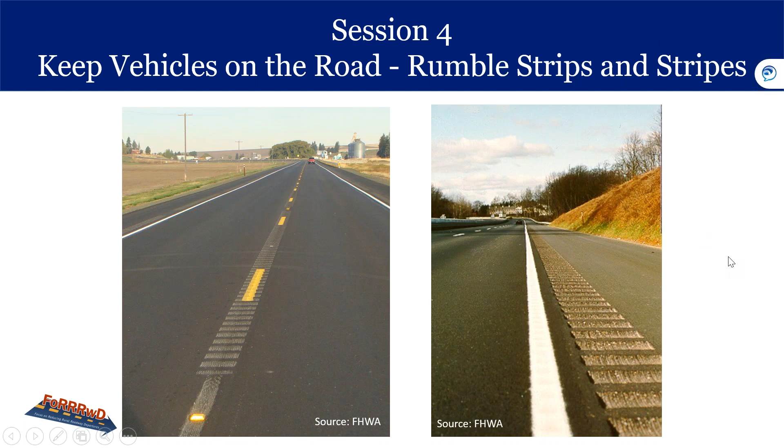Okay, so rumble strips and rumble stripes, let's get cracking on this. Our learning outcomes on this subject will be that after all of this, you'll be able to describe a rumble strip and a rumble stripe, and you'll be able to describe the placement criteria and installation considerations for rumble strips and stripes. You'll also be able to recognize the crash reduction potential for rumble strips and stripes.

So let's do a knowledge pre-test, and we're going to watch a video, and we'll ask you what is the concern raised in the video, and then what countermeasure could be used to address this concern. So let's watch this video.

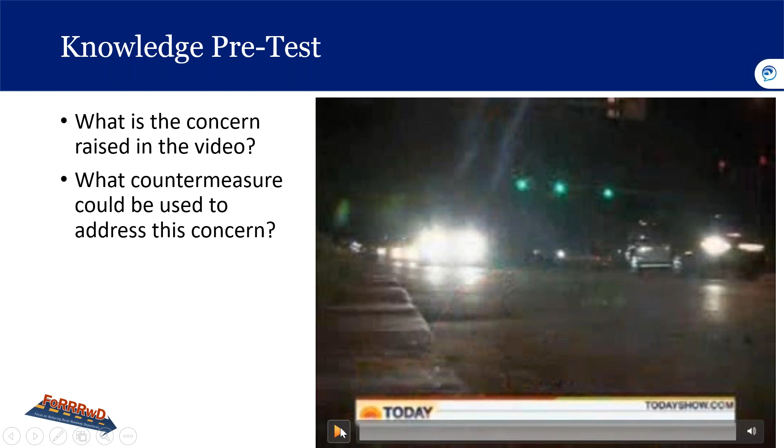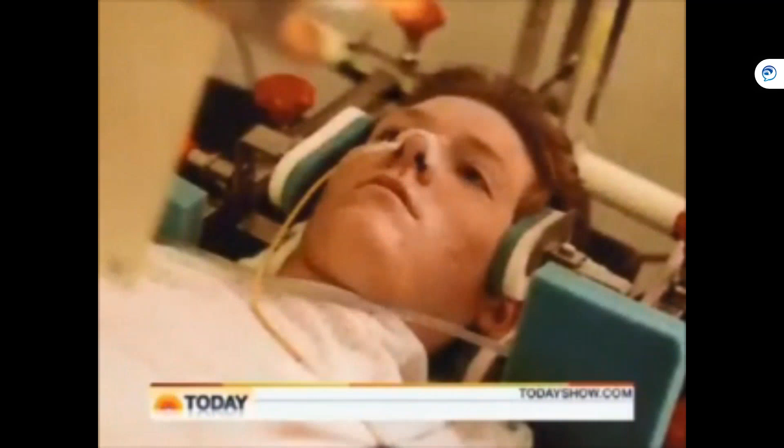I sit and replay that night over and over and over again, and I thought, I'm just so close to home. How'd you make it? That night, Rusty Burris was 18 years old with a bright future. But driving home from his girlfriend's house, his life changed forever. I knew I was tired, but I didn't really feel that I was that tired. And driving home, I got just a mile from home and fell asleep at the wheel. In seconds, Rusty's car drifted off this country road and rolled over. The impact crushed his roof and his spine. Rusty would never walk again. I've fallen asleep and crashed my car one time, and that's all it took. Experts say every day, millions of teens are dangerously tired when they get behind the wheel. More than a third of teens say they drive drowsy on a regular basis, and more than half of all fatigue-related crashes involve drivers under 25.

Okay, so we have some fatigued drivers, young drivers, and they talked about one driver who unfortunately was in a crash where he fell asleep and went off the road, and so he was seriously injured. So can you think of a countermeasure that we could use that could possibly have prevented that type of crash and other fatigue related crashes?

Well, I think we know where we're going with this, and the answer is rumble strips or rumble stripes. So that's the job of these rumble strips, to keep drivers alert, let them know when they've drifted to the outermost boundary of their lane, or just off the outside of their lane if it's on the shoulder. And we'll also talk about how it helps with other types of crashes. One of those is distracted driving, of course, which is a very serious concern these days, as everybody's driving around looking at their phones. So that can prevent the distracted driving crash as well.

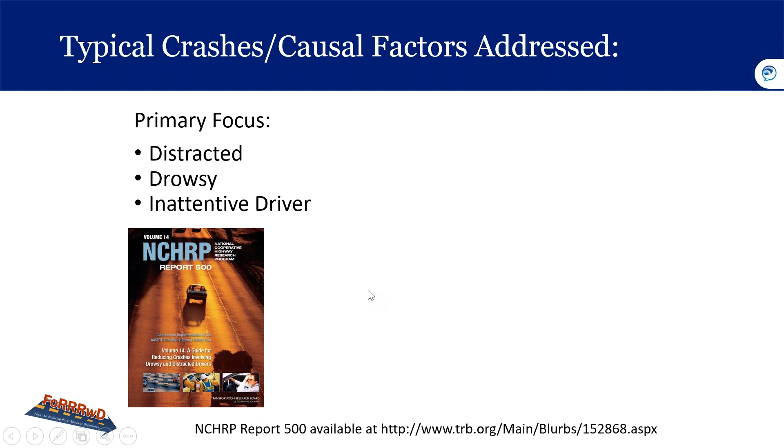The crash types addressed with rumble strips and stripes, what we're really focusing on, are roadway departure crashes, which include run-off-the-road crashes and head-on crashes. So they're either leaving the road to the right or crossing the center line. These rumble strips can be placed on the edge line or just outside it, and also on the center line.

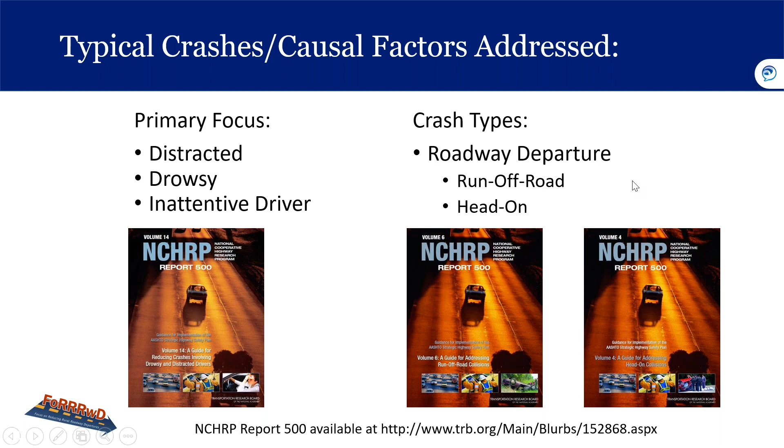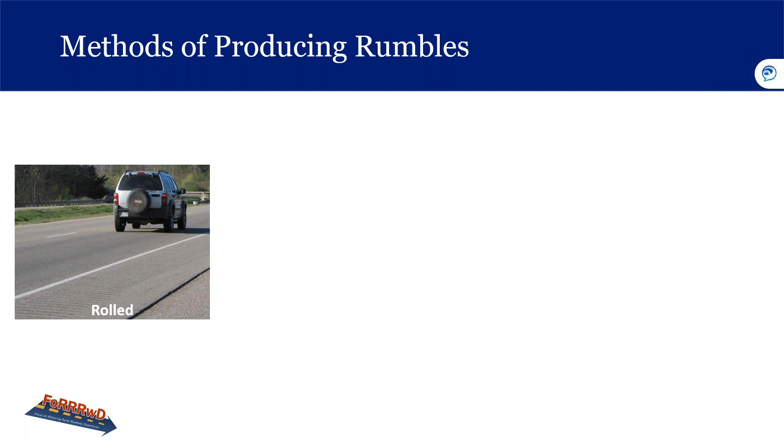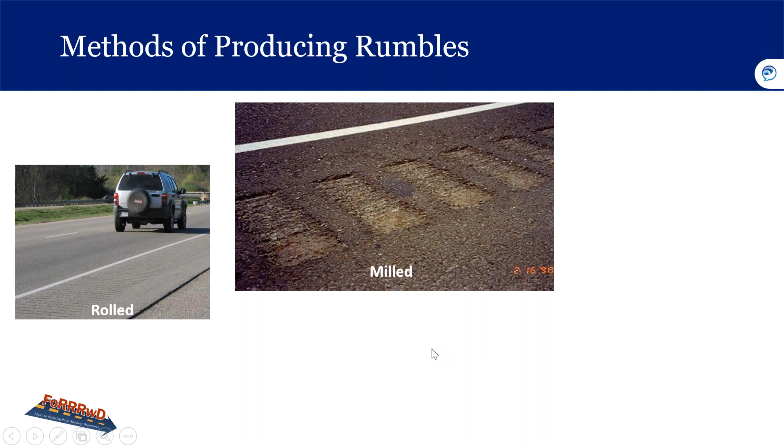There are different methods of producing or installing rumble strips. We have the rolled rumbles, which are rolled into the fresh layer of asphalt. Then you have the milled rumbles, which are grinded in afterwards. And then the raised rumbles, which come in different types of products from marking materials, or even ceramic type buttons and stuff like that.

The rolled rumbles are not used much anymore, as they have to be done at the time of paving, and they do not produce as much noise or vibration as milled rumbles. So the milled is preferred.

The raised rumbles may be used on PCC pavements or where the pavement structure does not allow for milling. Thermoplastic markings can be applied to create a profile marking, which also produces a rumble effect and enhances visibility. A few agencies have used this treatment with good results, but there has been no evaluation comparing raised rumbles to milled ones. In addition, in snow zones like Ohio, raised markings will require more maintenance.

You can find out more information on this in NCHRP Report 641 on page 117. It's called a study of effectiveness of various rumble strips on highway safety, done by the Virginia DOT.

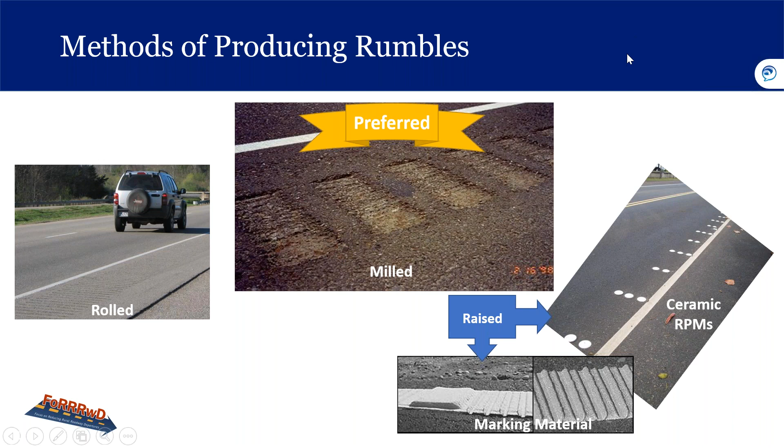Then you have the center line rumble strip, which is a longitudinal safety feature installed at or near the center line of a paved roadway, made of a series of milled or raised elements intended to alert inattentive drivers through vibration and sound that their vehicles have left the travel lane. In most cases, the centerline pavement marking is placed over the rumble strip, which is sometimes referred to as a centerline rumble stripe.

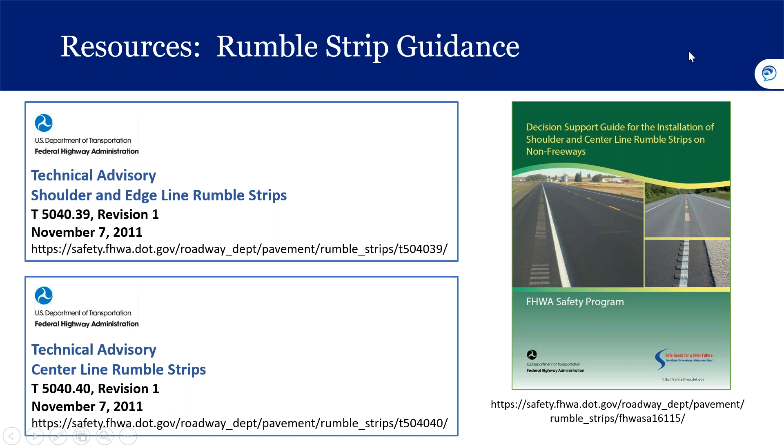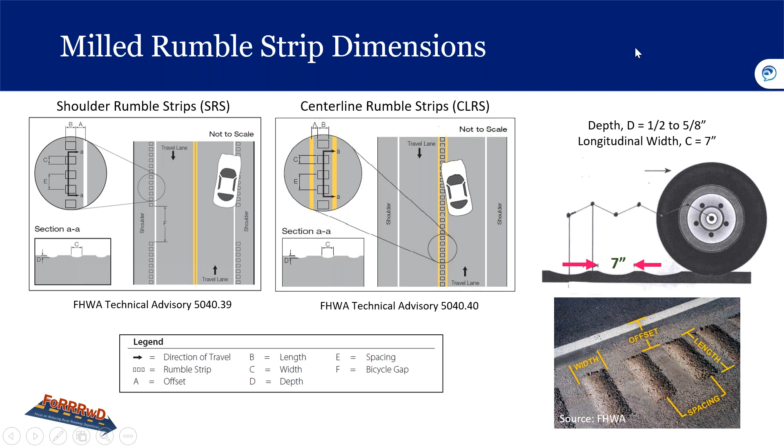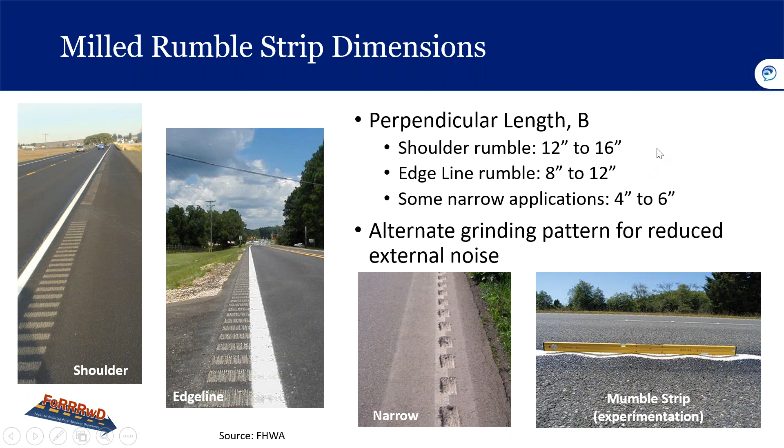As a note, this does not meet the MUTCD, but was done for comparison purposes only. Some states are doing similar, but with removal of the old edge line stripe, which results in a wider lane, a narrower effective shoulder.

Whoops. What do I do here? Go all the way to the end? Hang on a second. Let's get back to my slide. I was going forward the whole time. Okay, come on, Michigan. Figures Michigan would do that to me, right? Okay, so where was I?

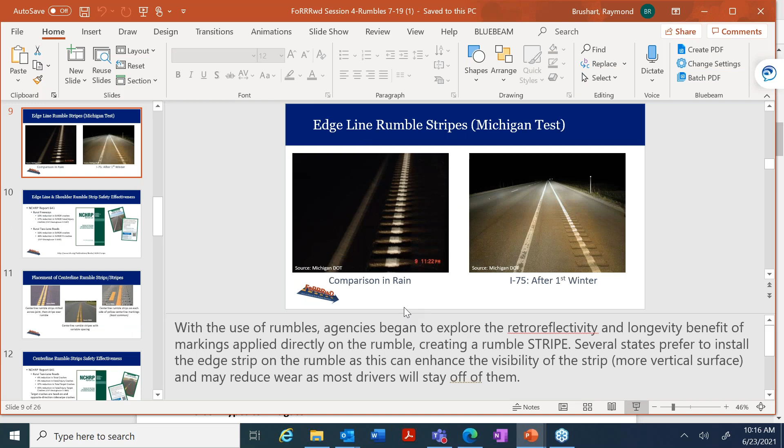Here we go. So as you can see, in wet weather and in rain, you can still see the reflectivity of the edge line, and that helps motorists out with a safety benefit as well. That's one of the benefits of the rumble stripe, and it's actually becoming quite popular since this study resulted. You'll see a lot more of this, even in Ohio, in the last 3, 4 or 5 years.

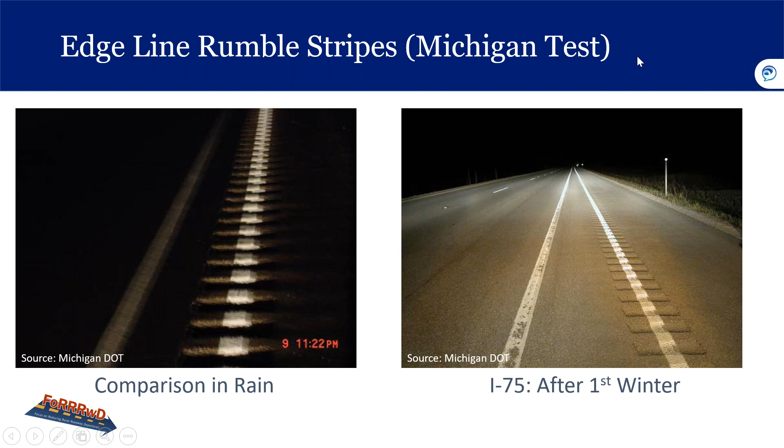NCHRP did some research studies on the edge line and shoulder rumble strip safety effectiveness. The first one is the NCHRP report 641 for rural freeways. In that research, they determined there was a 10% reduction in the single vehicle run-off-the-road crashes, and a 17% reduction in the run-off-the-road fatal and injury crashes. That's from the Crash Modification Factor Clearinghouse, ID 3447.

Then on the rural 2-lane roads, an even higher reduction in these run-off-the-road crashes, single vehicle run-off-the-road crashes, and an even a lot higher reduction, 36%, in the single vehicle run-off-the-road fatal and injury crashes.

And even better - if you really think about it, how many crashes do we think we actually prevented? Because obviously, if a crash doesn't happen, it's not reported. So that's something to think about as well. But there are some more resources for you to check out, and they're free. Report 641 is the guidance for the design and application of shoulder and centerline rumble strips.

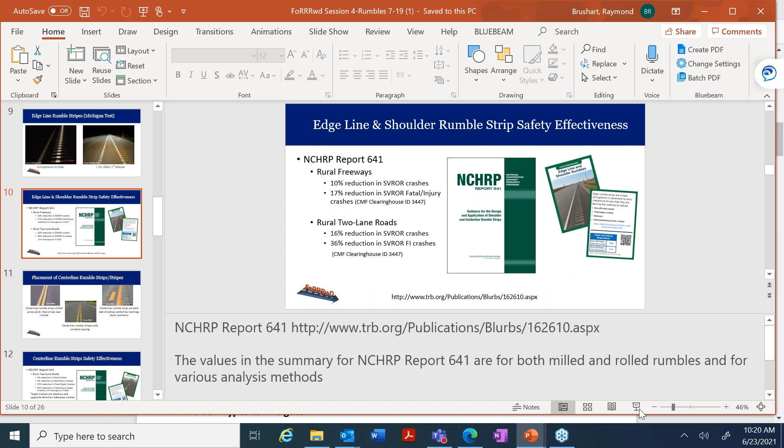That's good that they're becoming a lot more common than they were 10 years ago. I like that I see them quite a bit on our two-lane rural roads, not just ODOT routes, but also on county roads in Ohio.

That's where we really want to see these become even more common, to be used in resurfacing projects, to make sure there's a good surface on the roadway. There's probably going to have to be some public interaction and meetings, and we'll talk about how to appease the public with good explanations, like reducing external noise.

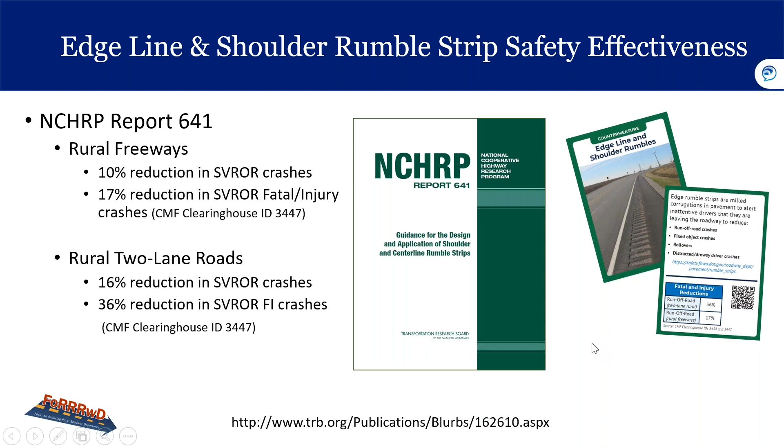There are different designs for the centerline rumble. The typical installation is across the joint. Sometimes there are concerns about the joint on a two-lane roadway, or a desire for more separation, so the rumbles can be installed on each side of the centerline. Of course, you need a certain width of pavement to begin with, probably a 20-foot pavement.

Some states use a variation leaving out every third rumble, which may produce a different sound and be less aggressive. However, since it's usually under the driver, this isn't expected to have much effect on the performance of the rumble in reducing noise and vibration.

These have been around long enough for public meetings and experience with the rumbles, so we know a lot more than we did 10 years ago. There are different methodologies or designs in different locations so we try to make everybody happy. Some are very rural locations, but others are closer to residential areas, and that's the reason we do our best to install a countermeasure that isn't going to upset everybody in the process.

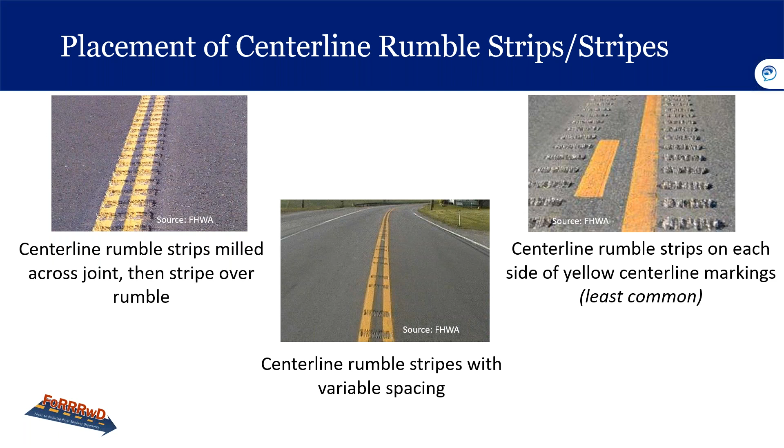There have been studies on centerline rumble strips' safety effectiveness, especially on rural two-lane roads, in NCHRP Report 641. They studied it and came up with crash reductions: a 4% reduction in total crashes. That doesn't sound like much of a benefit, does it?

They also found a 9% reduction in fatal and injury crashes, a 37% reduction in total target crashes, and a 45% reduction in fatal and injury target crashes, from the Crash Modifications Clearinghouse. The target crashes are head-on and opposite-direction sideswipe crashes, which is what these rumbles on the centerline are meant to prevent, keeping people from crossing the centerline.

We've given you a link so you can go directly to NCHRP Report 641, titled Guidance for the Design and Application of Shoulder and Centerline Rumble Strips. On the far right are cards that FHWA printed up, which you can order off the FHWA safety website. Each countermeasure has its own card, front and back, with pictures on one side and more information, links, and expected crash reduction numbers on the other.

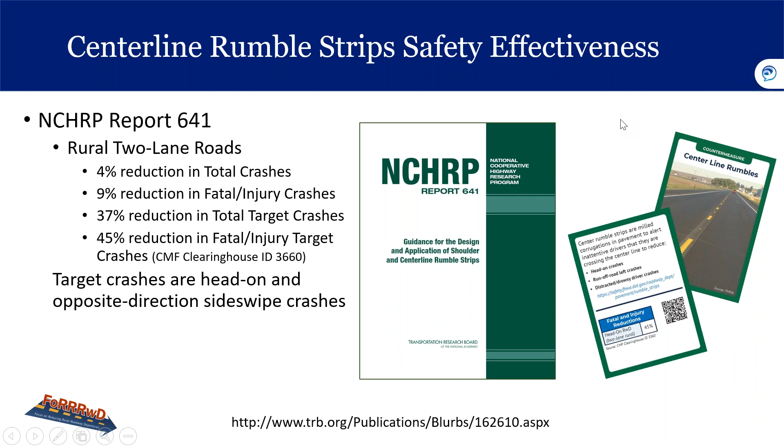And then we have some other rumble strip and stripe considerations as well.

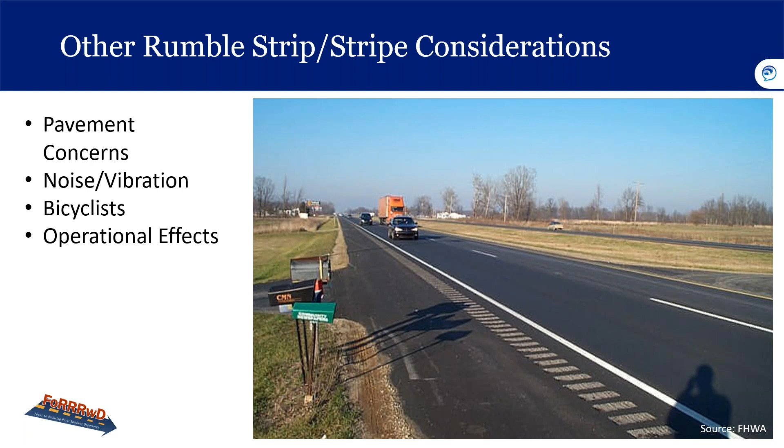Pavement concerns: we talked about the joint, how installing centerline rumbles can affect the joint in the middle of the road where the two lanes come together. There's also noise and vibration for residents, and bicyclists. We can't stress enough how important bicyclists are to us here at ODOT, so we're putting bike lanes in all kinds of places, even bike paths. We concern ourselves with the safety of bicyclists as part of our roadway. Bicyclists have concerns about shoulder and edge line rumbles, about how they affect their ability to ride on the roadway and their safety. So let's talk about each of these.

So the rumbles on the joint - this is the center line on a 2-lane road. There are concerns for these rumbles.

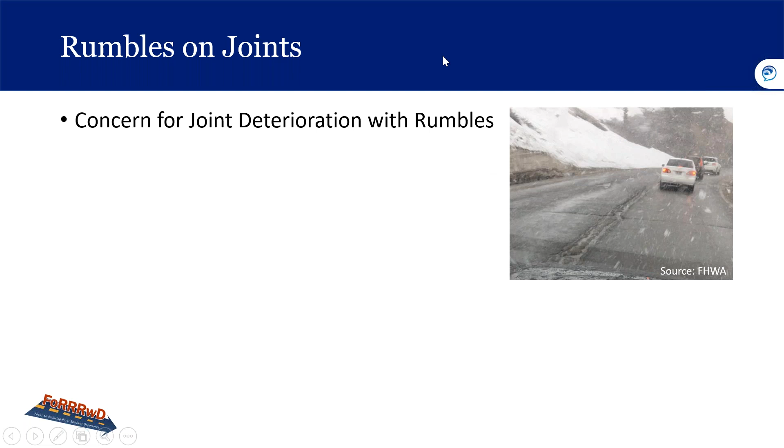I think Brian Schleppy's in class, right? He's probably aware of this type of installation. But if you're planning on installing these centerline rumble joints, this is how you should resurface the roadway. So that's something you should talk to your contractor about, and put in your plan.

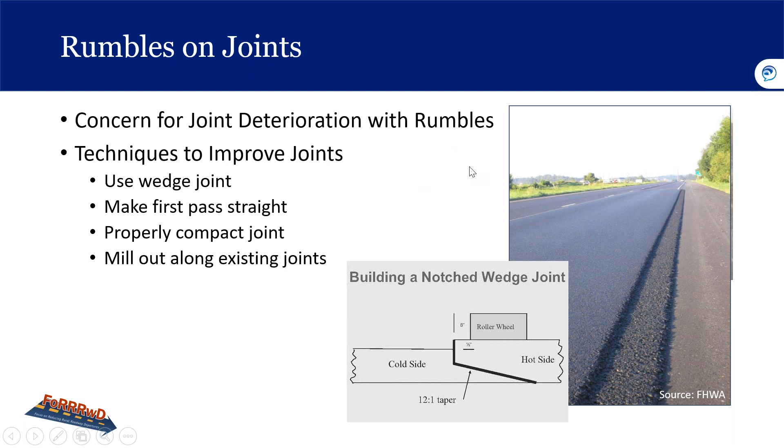In Ohio, we've got lots of lane miles of chip and seal roadways, so you might be asking yourself, can you do this on chip and seal roadways? The states of Michigan and Washington have done some studies and have experience installing rumbles on chip and seal roadways. Michigan has milled the rumbles in on chip sealed roadways, and Washington has chip sealed over the rumbles. Based on their experience, they may want deeper rumbles to accommodate future chip and seals, but they've determined that as long as the rumbles are still visible and make noise, they still have some benefit to keep drivers alert. At this point we don't know of any real research studies on these, but they are being used on chip and seal roadways.

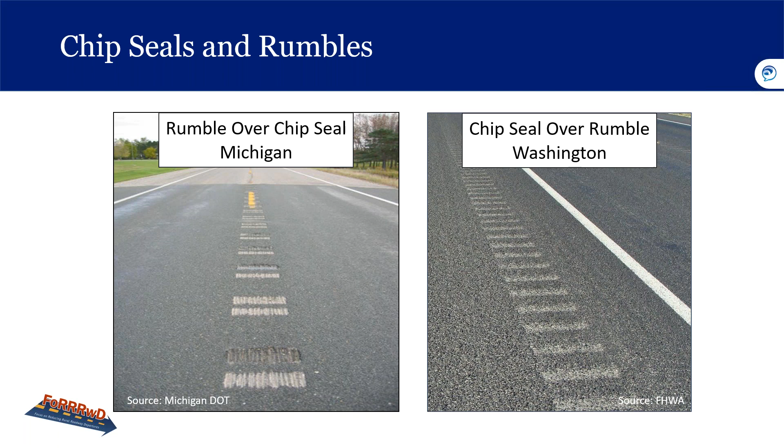So maybe even ODOT has some chip and seal - we've begun to chip and seal some of our lower volume state routes. So who knows, maybe we'll decide to try this out on those roads.

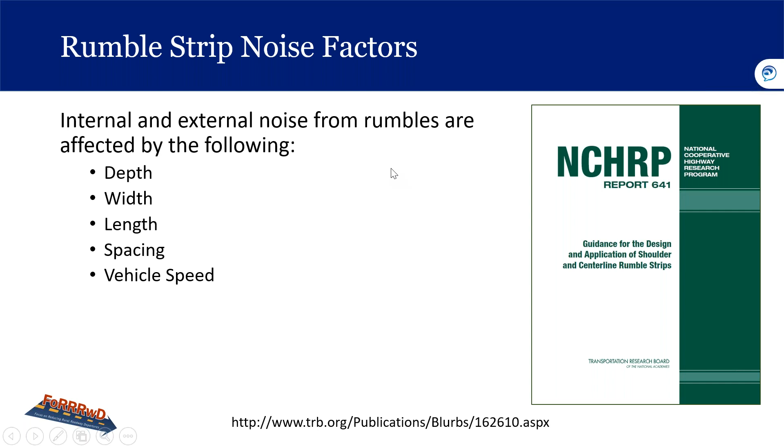On the issue of addressing rumble strip noise issues, look at page 140 in report 641, and also the FHWA booklet 5040.39 I showed you earlier - there's information about complaints from residents living near rumble installations. Of course that's not uncommon. In most cases, it isn't that the rumbles result in a higher noise level, but that they are a different pitch. For shoulder rumble strips, report 641 says consideration should be given to terminating the rumble strips about 650 feet prior to residential and urban areas. This threshold is based on studies showing noise impacts from this distance proved tolerable to nearby residents.

Even the Oregon Department of Transportation has produced technical guidance on this, with further rumble strip use guidance documents. You can go to oregon.gov/ODOT/engineering document/technical guidance, and they have produced some guidance documents based on their experience as well.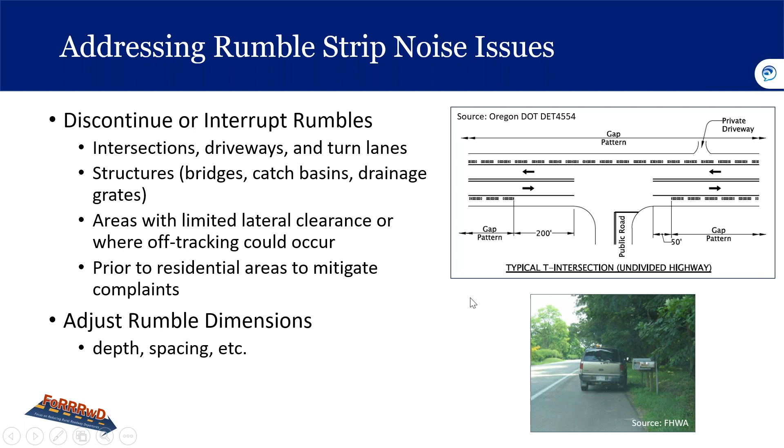When we alter the dimensions of the standard milled rumble to lessen the noise, we're creating a mumble strip. The mumble strips were first evaluated in California and Minnesota as they tested various widths and spacing. Preliminary results showed a reduction in external noise.

The safety benefits have not yet been determined, but these results are very promising for cases where we otherwise would not be able to install rumble strips. Right now we have little to no idea of the effects on bicycle accommodation or pavements at this point.

The experiments in Minnesota and California have shown a substantial reduction in external noise and some reduction to internal noise and vibration, but there may still be enough vibration and/or noise internal to the vehicle to alert drivers. It's still unclear, so they're probably going to study these things further. For some sites, there's a significant difference in internal noise between pickup trucks compared to typical sedans.

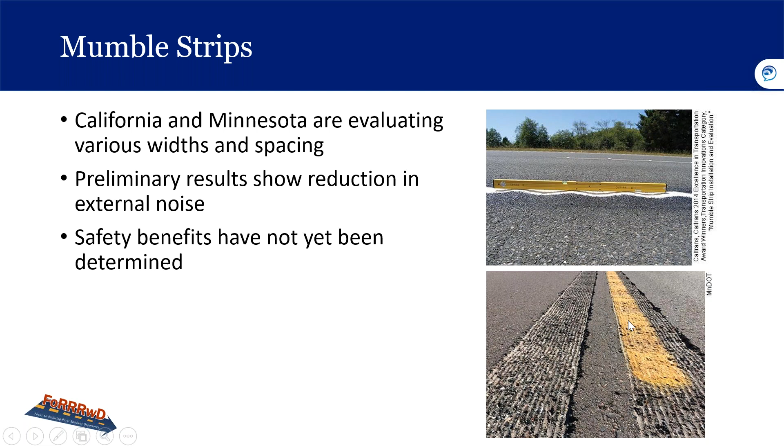Let's talk about bicycles and what they think of the rumble strips.

However, as legal road users, they may also be in the travel lane. There are a number of measures that should be considered to accommodate bicyclists. It also notes that some bicyclists have said they like rumbles, as it gives them a warning if a vehicle is coming up from behind them. That's important information to know if you're a bicyclist—that someone is coming up on you from behind.

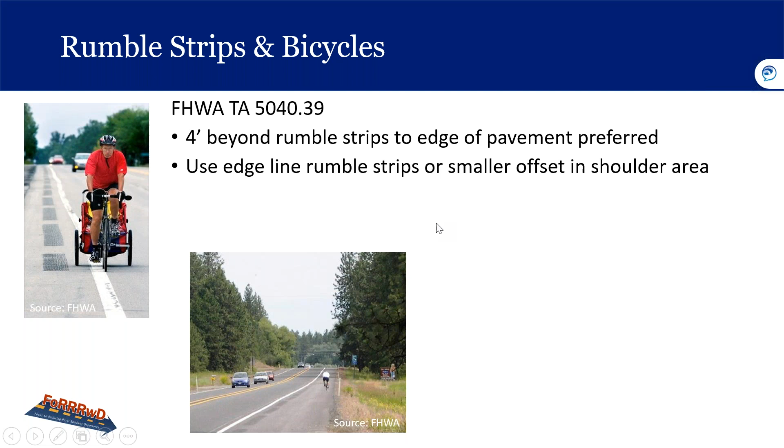We want to ensure there's a wide enough paved shoulder for bicycle travel. A 4-foot shoulder is preferred for bicyclists and recommended as part of new construction and reconstruction projects. Some agencies may have different minimums, and the width may need to be increased if riding next to curbs, guardrail, or other longitudinal objects. Using an edge line rumble or smaller offset could also make more of the shoulder available for bicyclists.

We can incorporate gaps in the rumble so that a bicyclist can move between the lane and shoulder without traversing the rumble. The technical advisory shows a range of gaps and rumble lengths. The Oregon Department of Transportation example shown earlier uses 12-foot gaps every 48 feet. Some agencies use shallower rumble dimensions, like 3/8 of an inch in depth versus the typical 5/8 of an inch, as an acceptable compromise.

This slide is probably getting to be about 5 years old, so they've done some further research and experience with bicyclists on these as well. They must have had some good experience, because these rumble strips along the edge line and on the shoulder are becoming very common these days.

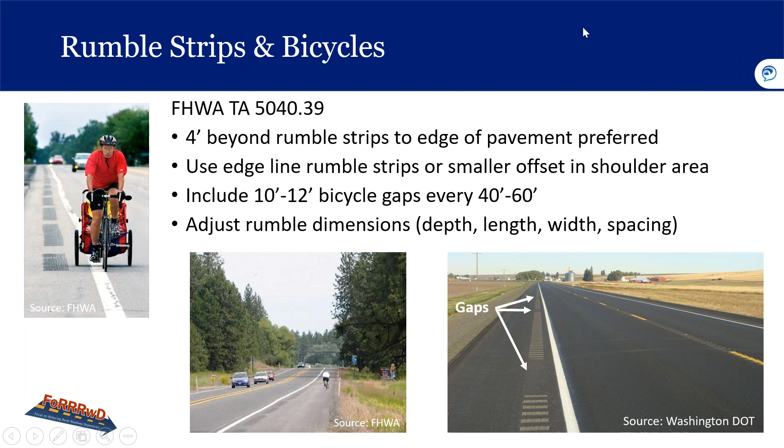Okay, let's talk about the operational effects of rumble strips on 2-lane undivided roads. When we talk about centerline rumble strips, it's shown that there's no adverse impacts on lanes greater than or equal to 10 feet. So if you have a 20-foot wide pavement, you can definitely install centerline rumble strips.

And they've been found to help center the vehicle in the lane when shoulders are 1 to 2 feet wide.

When centerline and edge line rumble strips were studied together, it showed no adverse impacts on lanes greater than or equal to 11 feet, and it helps center the vehicle in the lane when shoulders are 3 feet wide. That's more in line with an ODOT 2-lane state route. You rarely see that width on township and county roads, which obviously don't meet those dimensions.

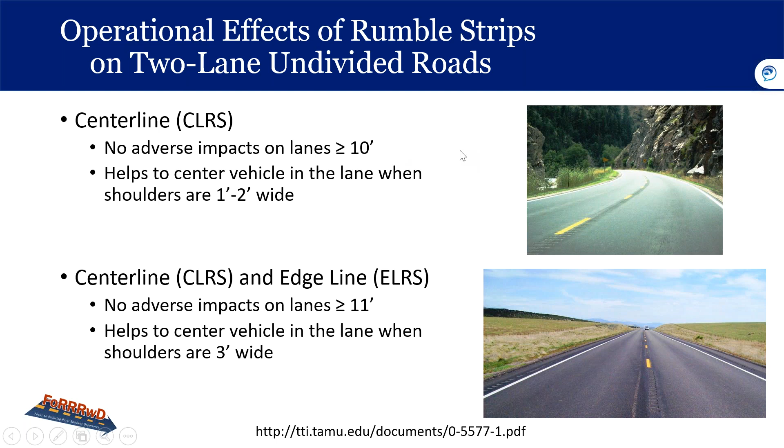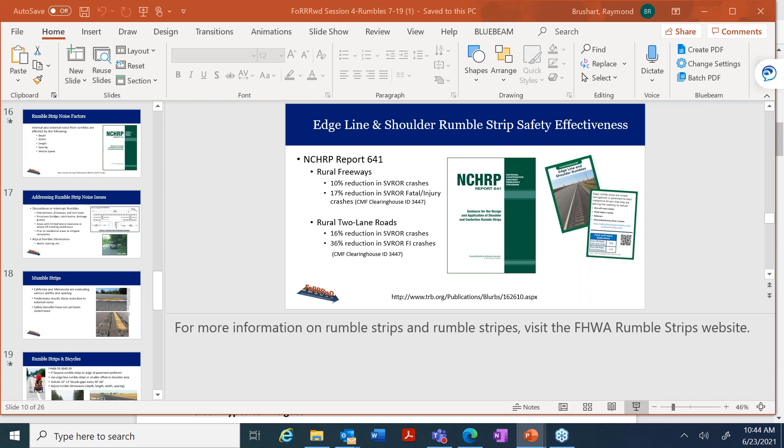Another resource is on our LTAP website. If you go to the LTAP homepage and click on technical assistance, you can find our RON update section, which stands for Route of Navigation. These are tech briefs we create especially for local agencies to read, and we have a whole section on roadway safety RONs. We've included this one here, keeping vehicles on the road with rumble strips and stripes.

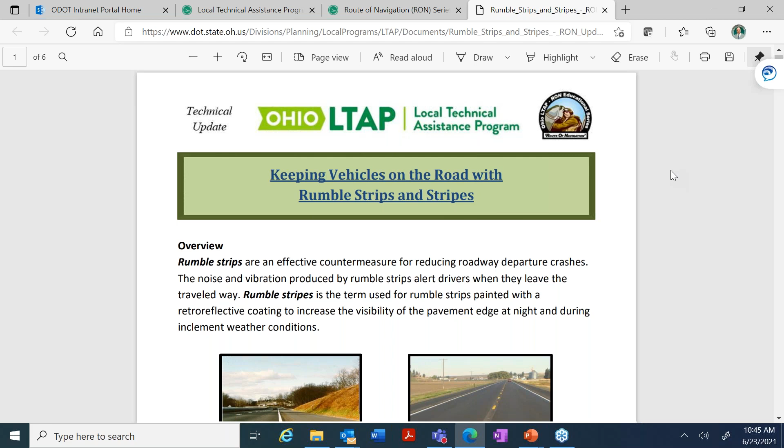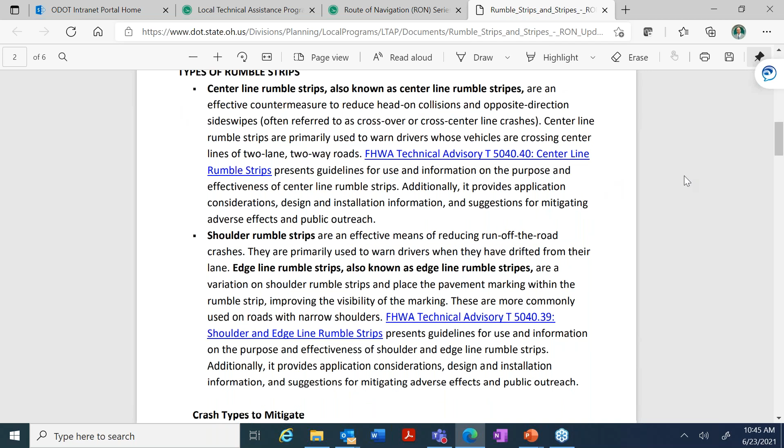This was created with a lot of information from the FHWA website and stuff we've covered so far today. It's something you can download and print out, and it has all the links in here from different resources to click on. Every countermeasure we've talked about in this webinar series, we've created a RON update for. There are a couple of them in the handout section on clear zones right now. Just wanted to share that the Ohio LTAP website is a good resource of information for roadway safety.

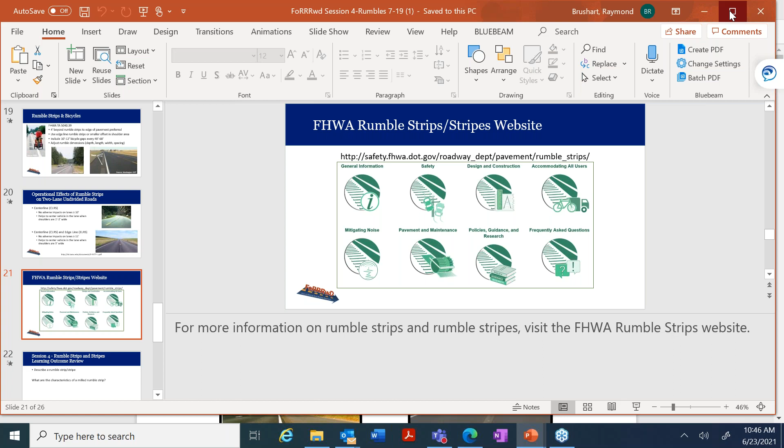Okay, so let's see if we've accomplished our learning outcomes for this section. Can you now describe a rumble strip or stripe? And what are the characteristics of a milled rumble strip?

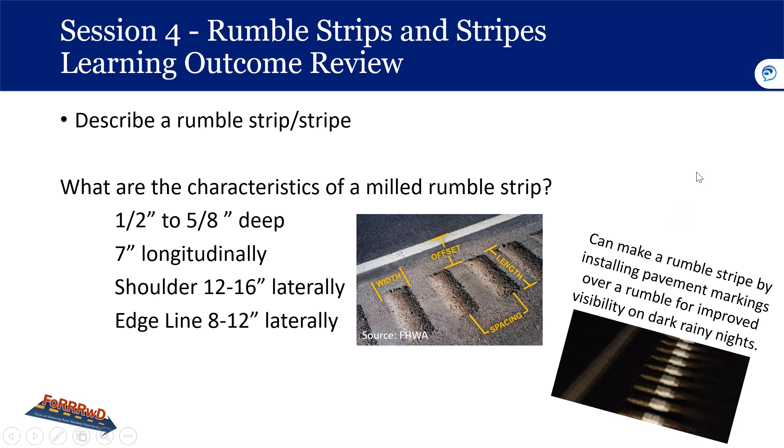We have additional comments people have typed in. Can be raised, milled, or rolled, that's from Mike.

All right, very good. Okay, let's go on to another question. Describe the placement criteria and installation considerations for rumble strips and stripes. So what should be considered when installing rumbles?

What do we talk about on that? And the questions box is open. Michael says lane width. Barbara says residential areas, driveways, cross streets. Kevin says lane width, shoulder width, vehicle speed. Sarah says residential area if there are bike users. And several additional comments regarding bicyclists or bicycle traffic.

All right, very good. So we went over a whole list of considerations from bicycles and different noise levels and how to design the rumbles to produce different levels of noise and vibration. We showed how different DOTs like Oregon had a technical drawing showing how they design their rumbles near intersections, different types of rumbles for different considerations, width of lane, proximity to edge line.

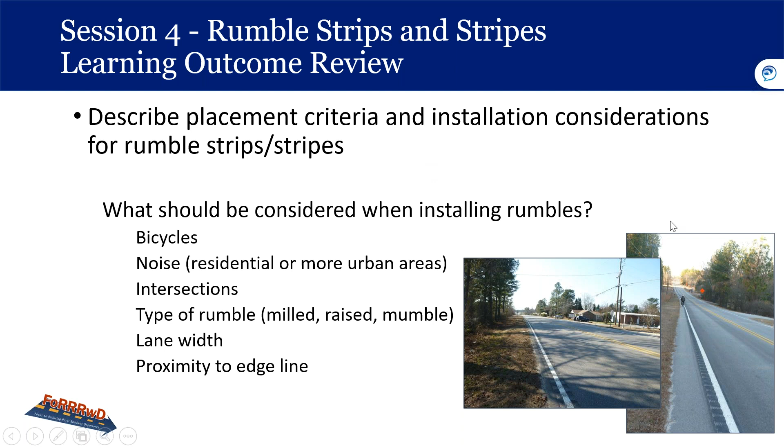Okay, one of the learning outcomes was to recognize the crash reduction potential for rumble strips and stripes. So what are the crash reduction factors for edge line and centerline rumble strips on 2-lane rural roads? Anybody remember that? All right, and the questions box is open.

Kevin says, don't remember, but much higher for head-ons and sideswipes. Yes, that's definitely true. David says 45% reduction in targeted crashes. Michael says 45% reduction for fatals. All right, good job, guys.

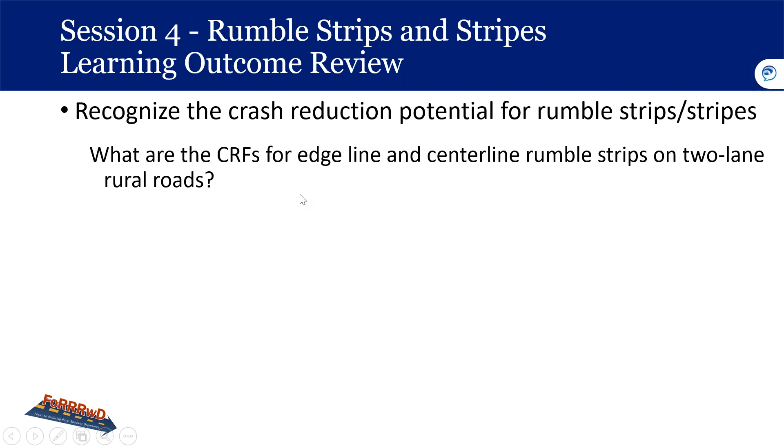Well, if we go back to these trading cards that FHWA prints out, we can see what they say about the crash reductions by looking at the back of them. There's a card for edge line and shoulder rumbles and another card for centerline rumbles. They show that for the edge and shoulder rumbles on these 2-lane rural roads, there was a 36% reduction in fatal and injury crashes. And for the centerline rumbles, for the targeted crashes of opposite-way sideswipe and head-on, there was a 45% reduction in fatal and injury crashes.

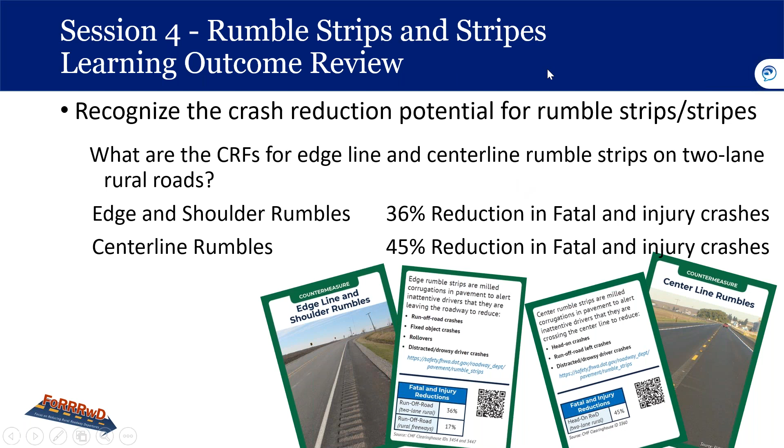And in my opinion, these numbers are low because, like I said, we don't have any data on all the crashes that we prevented, right? No one fills out a crash report for a crash that didn't happen, right? What they're doing there is strictly looking at 1 to maybe 2 to 3 years of data after the installation, comparing it to the years before the installation.

Okay, here's another question for our post-test. What are some of the issues we discussed that are shown in these photos? And the questions box is open.

These pictures kind of have that look like they're somewhere out west, don't they? Brian says, paint looks iffy on centerline.

These pictures were actually taken in North Dakota. They might look like somewhere rural in Lucas County, you know, that flat land up there, but actually from North Dakota.

Curtis says, deterioration of pavement markings.

All right, see if we get somebody else real quick here. Brian says, do they have traffic in North Dakota? Not when these pictures were taken, right? I'd kind of be scared to be a bicyclist out west in the middle of nowhere with no other traffic around. You need that other traffic to scare off all the grizzly bears, right?

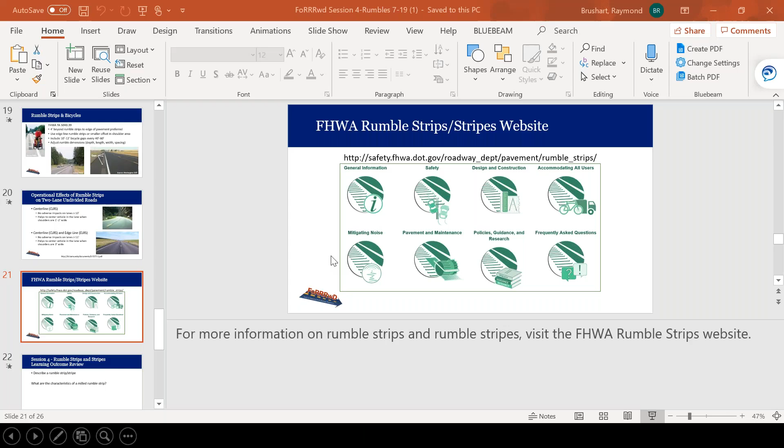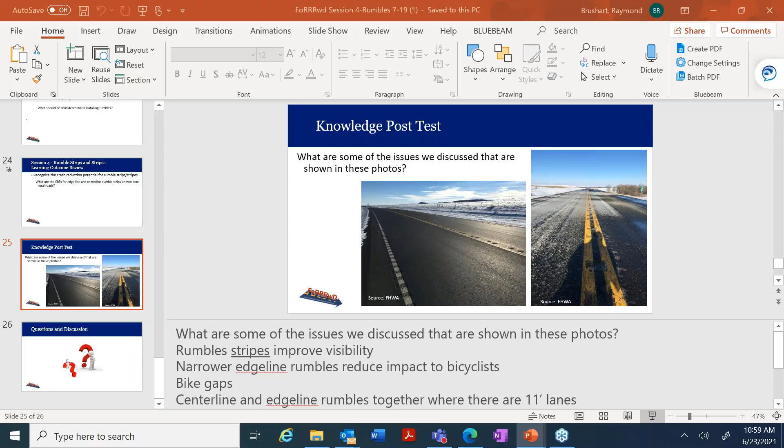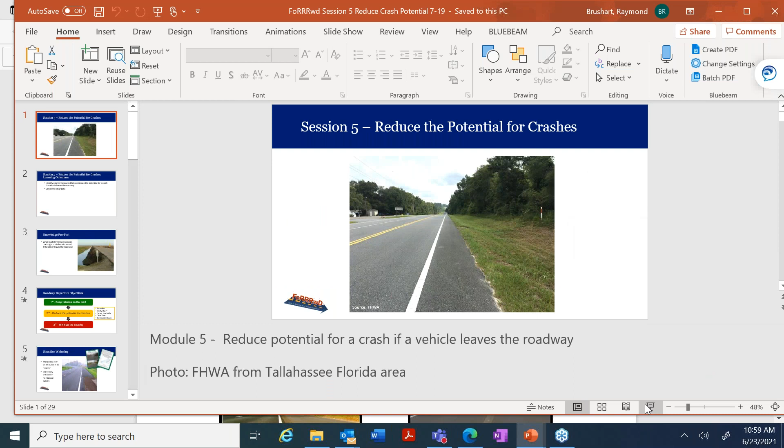Let's see, let's find it here. Okay, so...

Now we're going to move on to our second strategy in reducing fatal or injury crashes - roadway departure crashes - and that is to reduce the potential for crashes after a vehicle has left their lane.

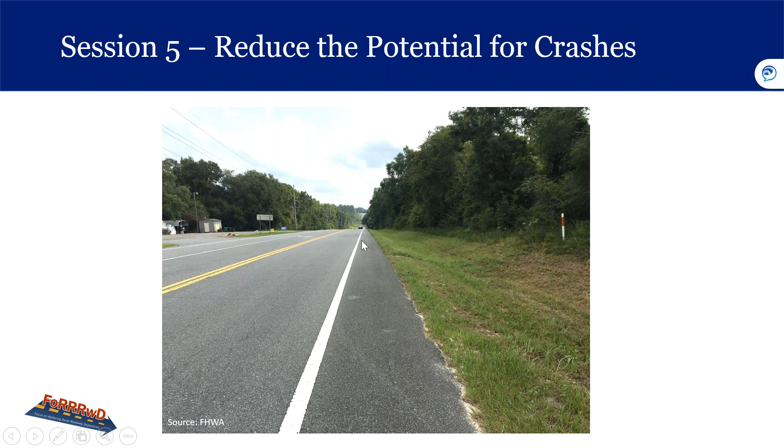This picture is from Tallahassee, Florida area. What do you see in this picture? If someone goes out of their lane, goes off to the right side of the road, they have a recoverable area there. It's not a deep ditch, and there's no trees along the edge of the pavement, no unprotected bridge abutments. So the idea here is the car can go off to the right and recover, getting back into their lane without a crash ever happening.

So our learning outcomes for this session are to identify countermeasures that can reduce the potential for a crash if a vehicle leaves the roadway. We'll also define what the clear zone is.

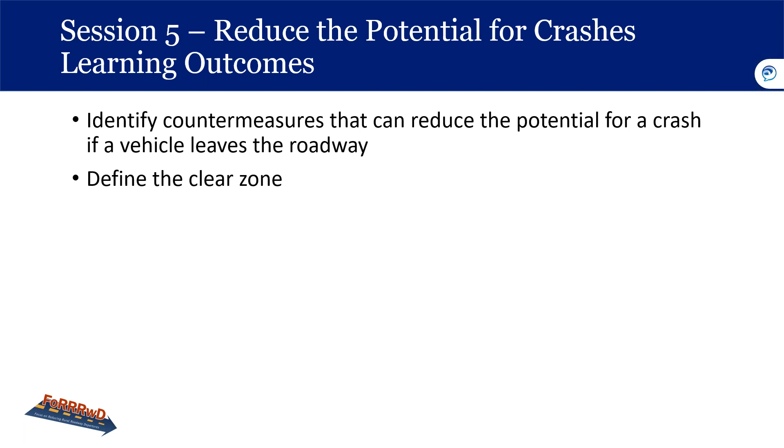So here's our knowledge pretest. Let's take a look at that roadway on the right. It's very different from the Tallahassee, Florida picture, isn't it? So what road elements do you see that might contribute to a crash if the driver leaves the roadway in that picture? Michael says, wow. Okay, well besides wow, what specifically do you see that might contribute to a crash?

Bobby adds, holy moly. Sarah says, narrow shoulders, deep ditches, no guardrail. Barbara says, adjacent slope. Michael says, small shoulder, steep slope, no guardrail. Tanvir says, crazy deep ditch without any guardrail. Brian adds, steep banks, high risk potential. Michael adds, and a rough road. Yes, those are all correct.

So we've got - let me go back here. What do we do here? Let me go back. So definitely we see basically no shoulders, a steep slope, and the slope could be so steep that it causes a rollover, which is bad news because what's at the bottom of the ditch? We've got water. So you could end up upside down in your car in water. Not a good outcome. So yes, we can see what's wrong with this roadway.

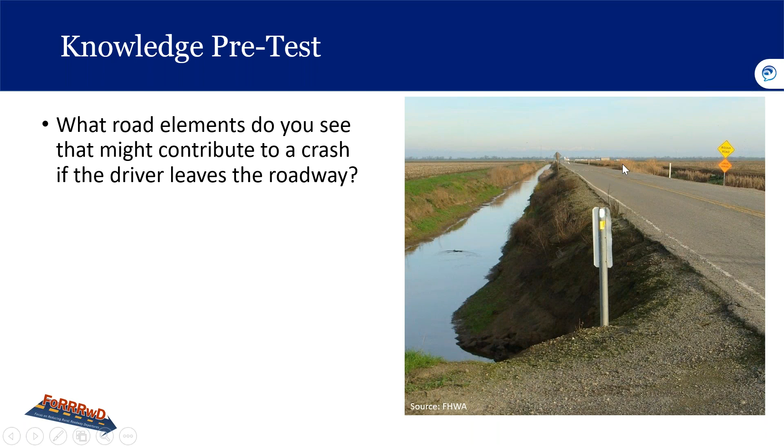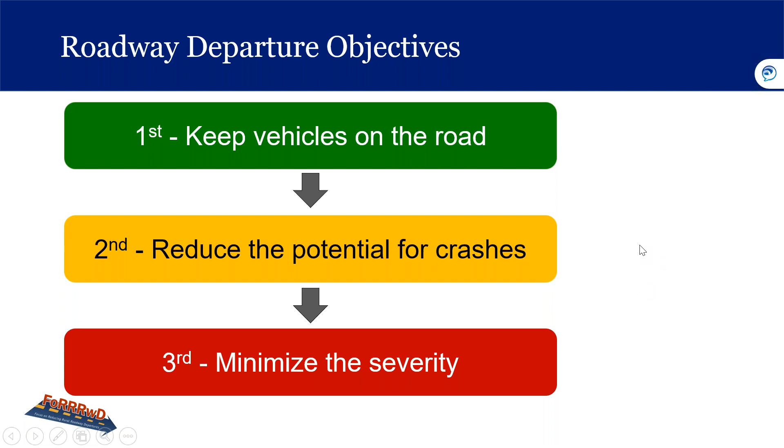The potential for a bad crash is definitely there. So to summarize our roadway departure objectives: first, we want to keep vehicles on the road with different countermeasures. Secondly, we want to reduce the potential for crashes. Thirdly, if there is a crash, we want to minimize the severity of that crash. So we're here to talk about reducing the potential for crashes if a vehicle does leave their lane.

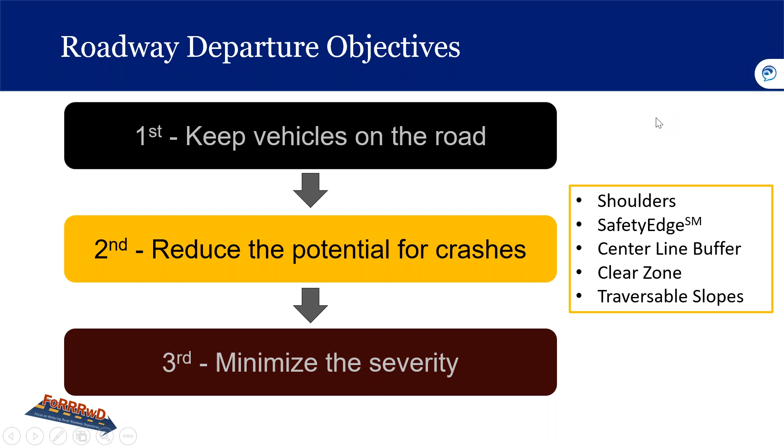The particular countermeasures we're going to look at here are the shoulders on the roadway, the SafetyEdge, a centerline buffer, the clear zone, and traversable slopes. These are our countermeasures for this session. Again, FHWA has produced playing cards for each of these countermeasures. So let's talk about shoulder widening here - what can shoulder widening do for us?

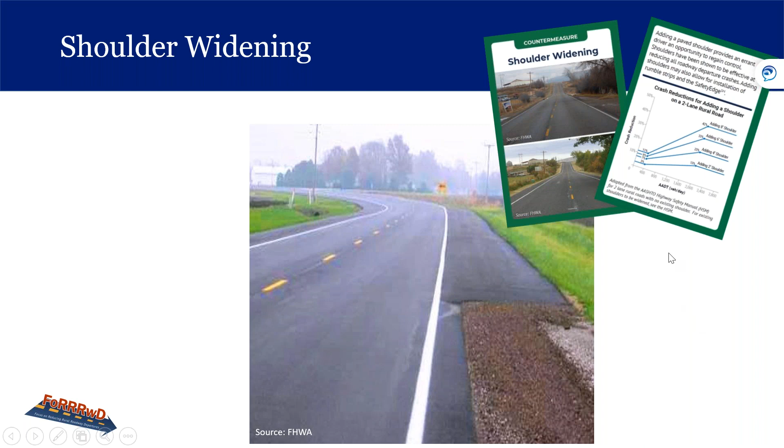Motorists rely on shoulders to recover, especially critical on horizontal curves. We've learned that curves are very common places for vehicles to leave their roadway - not just crossing the center line for a head-on crash, but also leaving the road to the right. So it's especially critical to have shoulders in curves. The presence of shoulders, paved or unpaved, can have a major impact on a driver's ability to regain control if they leave the traveled way. While it may not always be practical to widen the highway to provide shoulders, consideration of widening in critical locations such as curves, where roadway departures are more probable, might be appropriate.

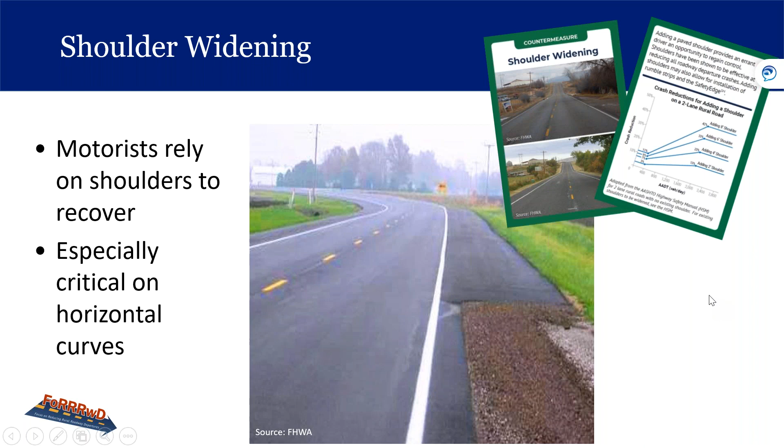Let's take a look at the safety effects of shoulder widening. This figure shows the relationship of crash reduction and shoulder width. The crash reductions were adapted from the Highway Safety Manual for two-lane rural roads with no existing shoulder. We compare everything to a roadway with no shoulder starting out, and the Highway Safety Manual figure was adapted to show the reduction factors, as it's sometimes easier to understand the reduction rather than the modification factor.

The Highway Safety Manual crash modification factor uses a 6-foot wide shoulder as the baseline. If we take a look at our graph on the right, you've got the comparison of average annual daily traffic, vehicles per day, versus crash reduction.

If you start off with no shoulder and add a 2-foot shoulder to the roadway, depending on the average annual daily traffic, if you go up to even 2,000 vehicles a day, which is a common AADT for rural roads, you can have a 13% reduction on that roadway. Then continuing with 2,000 vehicles a day, adding another 2 feet to make it 4 feet gives you 23%, a 6-foot shoulder is 33%, and an 8-foot shoulder is 42%.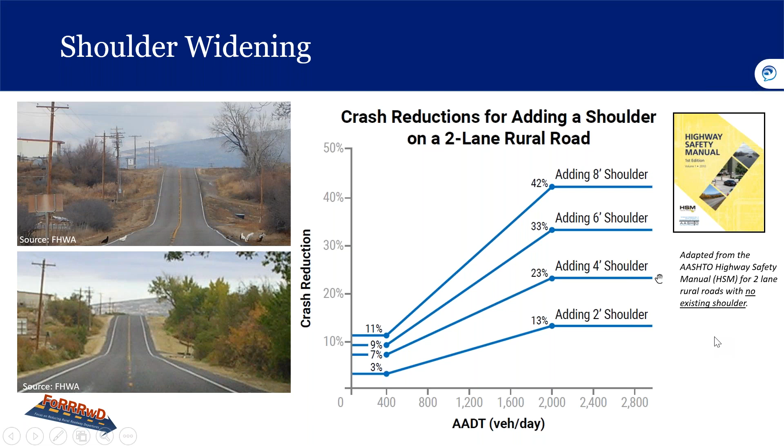This study spanned over 5 years of projects representing about 700 road miles of adding shoulders only, or shoulders with rumbles, or shoulders with rumble stripes. Additionally, the benefit cost ratio for two-lane rural roads of adding a shoulder only was 53 to 1. This would likely be much higher if widening only in the curves.

They actually produced a technical advisory on this called 'A Study of the Effects of Pavement Widening, Rumble Strips and Rumble Stripes on Rural Highways in Alabama.' You can Google that - the name of it is at the bottom of the screen. Again, it's another good reason to download the handout, the PDF version, so you'll have all of these links at your disposal.

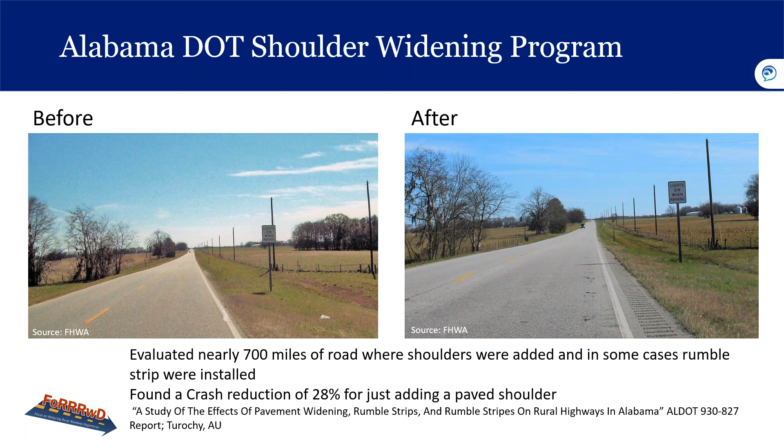That's very dangerous when you have a pavement edge drop off of that much - that might be 5 or 6 inches there. When the front right tire of a vehicle goes off the side of the pavement, it can be difficult to get back on. What happens is the driver will overcompensate when they don't immediately get back on the road, so they overturn the steering wheel. When the tire is done scrubbing against the edge of that pavement and it comes back onto the pavement, the vehicle overcorrects and shoots left of center line. That's how a lot of these really bad crashes happen.

So we actually have a video here. Let's run the video.

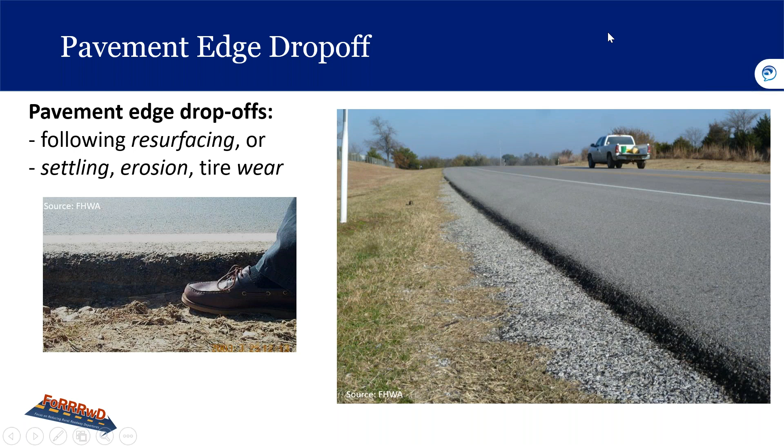And so we do that with this countermeasure. It's called the safety edge. They have a playing card with the information on the safety edge that you can check out. What we're doing with the safety edge is consolidating the pavement edge into a 30-degree shape during the paving operation to provide stability for vehicles recovering from a roadway departure. And we can implement this as a standard practice for paving and resurfacing projects, especially for 2-lane rural roads.

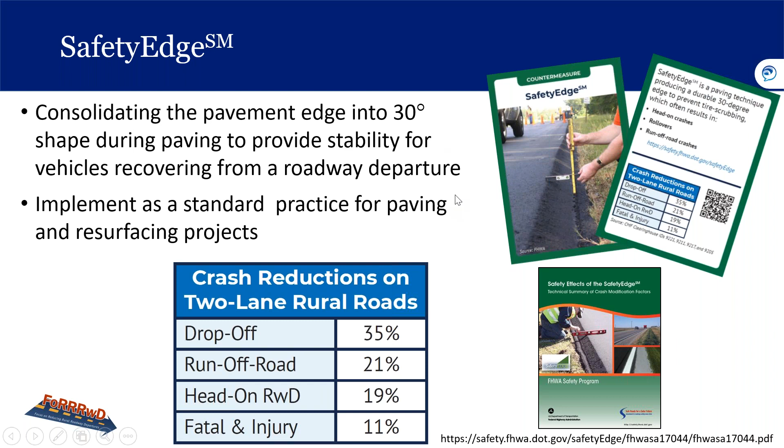This has been around for a while now, so we have some good data for crash reductions on these 2-lane rural roads. By using a safety edge, we can see crash reductions from the drop-off type of crash, reduced by 35%, run off the road by 21%, head-on roadway departure crashes lowered by 19%, or an 11% drop in fatal and injury crashes. Again, we have a resource printed up by the FHWA called Safety Effects of the Safety Edge. You can see there on the bottom right the link to that document with the latest information on that.

After a resurfacing project, we always put down some aggregate and bring it up to the edge of pavement. But this was taken a few years after that, so all that had eroded away. As you can see here, we've got a 30-degree angle on the edge of the pavement, which has been studied to show that it's very easy to get back on the pavement with that. On this side of the road, there's just a straight drop off, plus the edge of the asphalt has begun to unravel. So you get the benefit of a nice compacted edge that does not unravel if you have the Safety Edge.

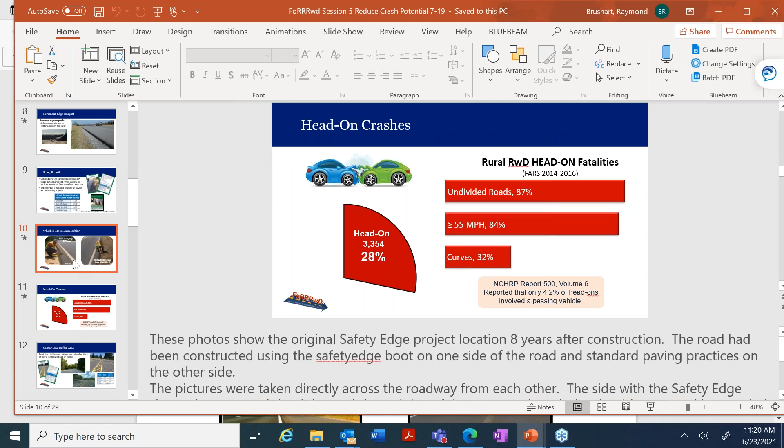You can watch the bus - let's go back and watch it one more time. You can watch the bus, how it was moving towards the shoulder before the crash because it could see it coming. Yeah, it's a school bus. You can see that the bus driver saw the whole thing coming. This indicates that the small car was angling toward the bus a long time in advance of the crash, and it showed a low angle crossover path. Miraculously, nobody was seriously injured in that crash.

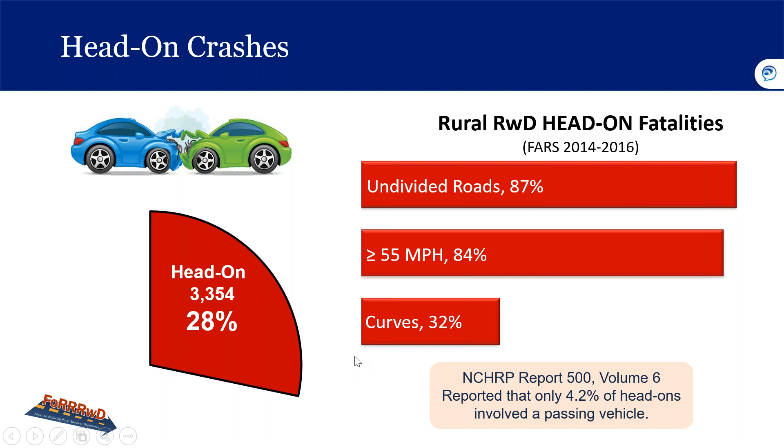So I think what it was is somebody fell asleep at the wheel. So with that said, what is a countermeasure that we can install to prevent this type of head-on crash?

If 2.5 feet or greater, a pair of double lines or center lines has more target value. A 4-inch normal width line produces a 12-inch wide center line - you have your 4-inch line, a 4-inch space, and another 4-inch line. That's what you have with the typical double yellow line.

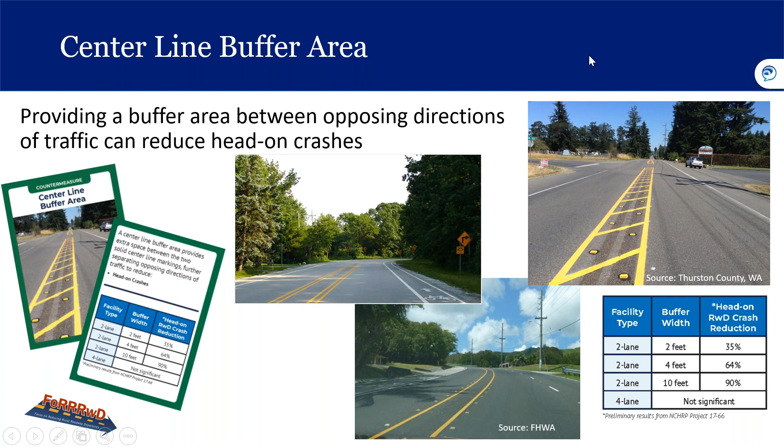Another countermeasure is the clear zone. So what is a clear zone? A clear zone is the unobstructed traversable area provided beyond the edge of the through traveled way for the recovery of errant vehicles. There's a playing card with the clear zone information on it. Its importance is only for understanding why countermeasures are effective in reducing rollover crashes, reducing crash potential or crash severity - flattening of slopes, removal of trees in the clear zone, and adjusting the width of clear zones are countermeasures. Location of applicable countermeasures are typically in the clear zone.

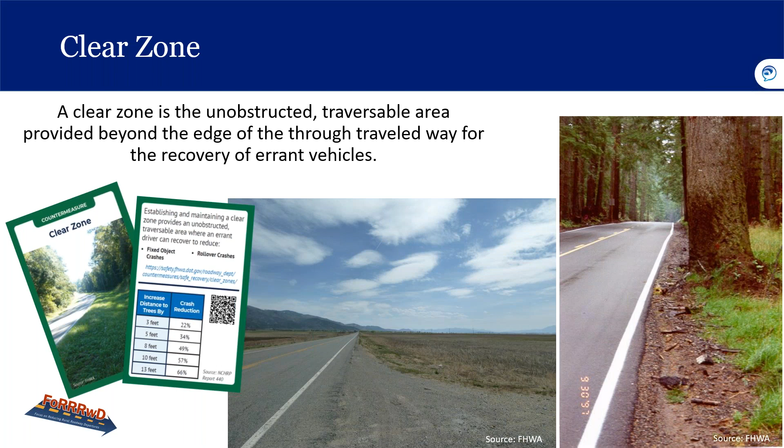So how much clear zone do we need? This table was developed, and you can find it in the roadside design guide, which you can download for free. The AASHTO roadside design guide provides guidance for the width of the clear zone. These values are based on a couple of studies that found that about 80% of vehicles stopped within 30 feet of the traveled way when they left their lane of travel to the right.

The values were factored for speed, average daily traffic, and side slope, but are still considered to address about 80% of encroachments. You've got your design speeds on the far left of the table, 4 different design ADTs in the second column, and it talks about the slopes involved - the foreslopes and then the back slopes.

And the end result is how much clear zone should you have in those situations. Typically we see the number 30 feet thrown around with ODOT roadways, but depending on the different variables, they recommend different widths of the clear zone to handle at least 80% of the different encroachments.

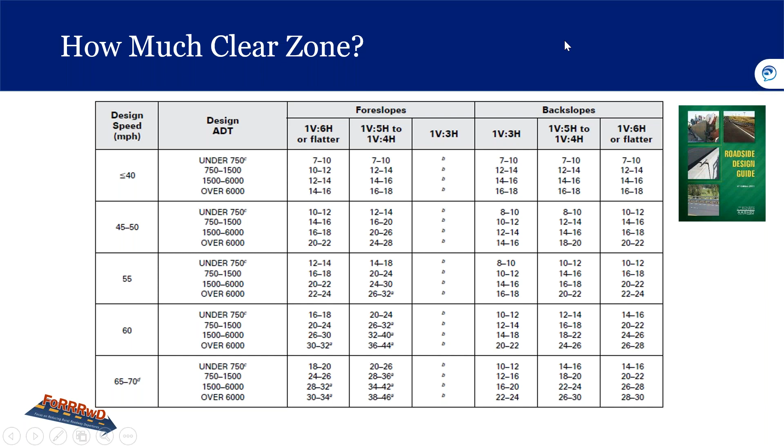When we say a traversable slope, what are we talking about? If we look at 1-to-4 or flatter, that is traversable. So we've got some pictures here on the right. That's a 10-to-1 slope you see at the top right. And what does a 1-to-1 look like? That's the bottom right picture. That doesn't look very safe, does it? That's actually pretty scary, I think I get nightmares from that picture.

So roadside slopes that are 3-to-1 or flatter are considered traversable. This means that in most cases, an errant vehicle can cross over these slopes without rolling over. Slopes that are 4-to-1 or flatter are also considered recoverable. So you've got two terms there: traversable and recoverable. Recoverable means the driver can actually start recovering control on the slope. Slopes steeper than 3-to-1 are considered critical, and depending on their height, a barrier may be appropriate.

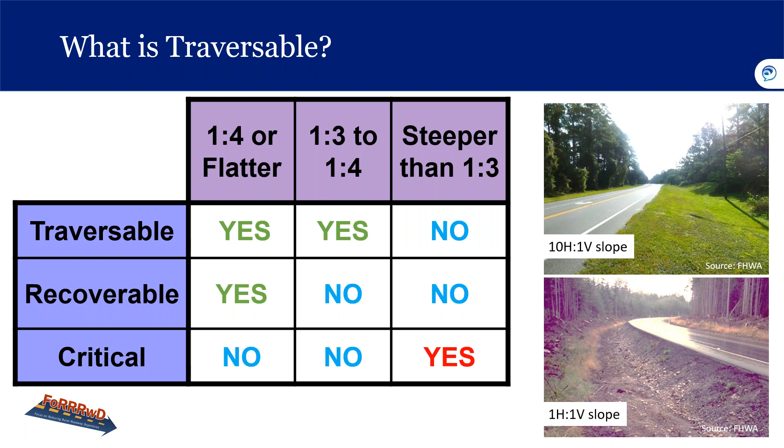So if you're wondering where those pictures are, the top is in Florida, the bottom picture is in Washington State. We want to prevent rollover crashes from happening. That's what happens when our slopes are too steep.

So let's take a look at some information on our rural roadway departure rollover fatalities. Again, this is more information from the FARS, the Fatal Accident Reporting System. This data is from 2014 to 2016, about rural roadway departure rollover fatal crashes. 78% of these type of crashes happen in areas where the speed limit is greater than or equal to 55. 44% of them happen in curves.

49% of them occur on collector and local roadways. 76% of them occur on 2-way undivided roadways. 93% of them happen on our 2-lane roadways. And 30% of the fatal roadway departure crashes involve rollover crashes. So that's some good information to know.